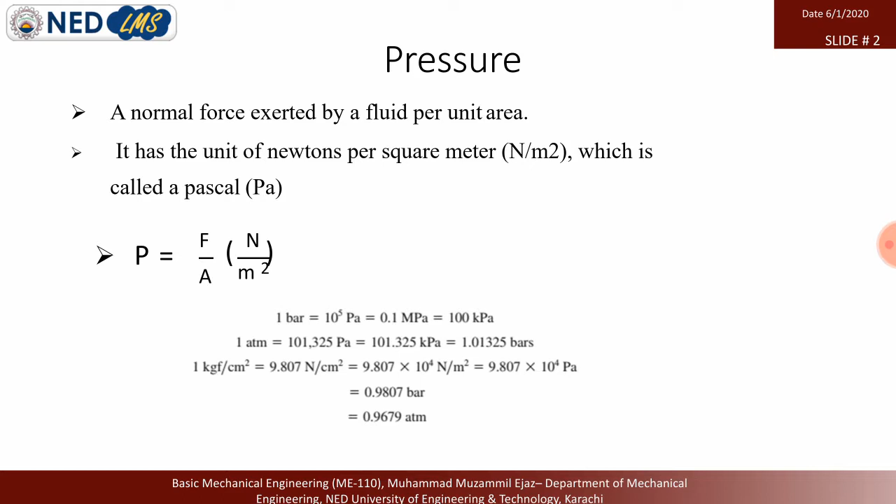Anyway, let's move towards the topic we left in the last lecture. Pressure definition, we already covered its definition and units. In the last lecture, we saw that pressure in liquids increases with depth, because weight due to gravity exerts pressure at different levels. At the top we have low pressure, but at the bottom we have the highest pressure. So this is the experiment.

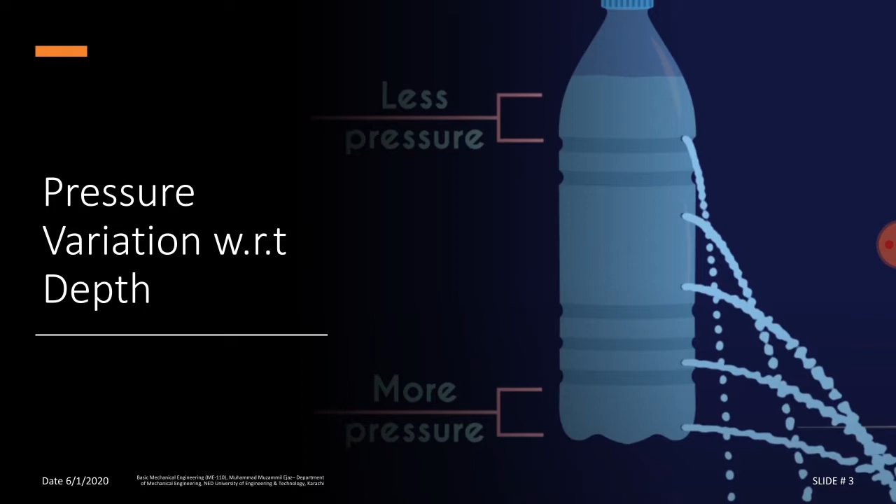In the same way, pressure exerts as atmospheric pressure. When we move above sea level, the pressure decreases. It is well defined in this.

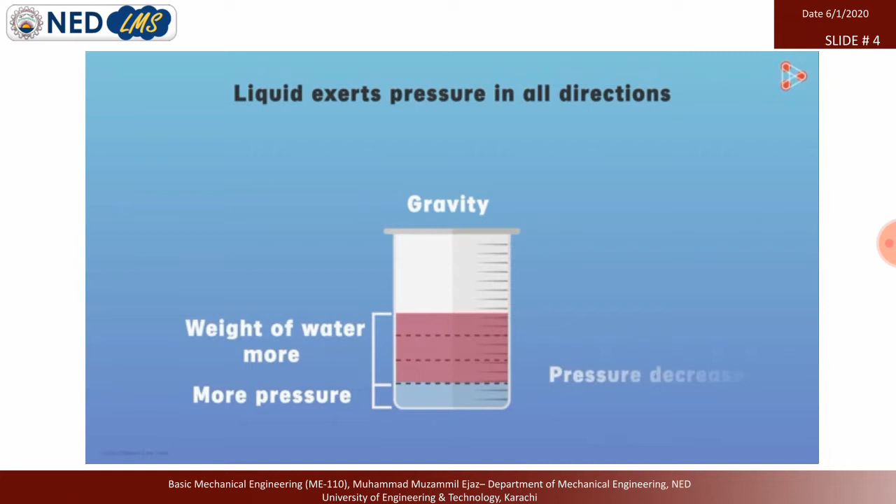Water exerts pressure in all directions. For example, here we have water in a beaker. Due to gravity, this water is pulled down towards the earth. If we divide this water into different layers, each layer is being pulled down by the earth. Due to this pull, water exerts downward pressure, and this pressure is uneven throughout - the bottom layer experiences more pressure than the top layer. This is because the weight of water above the bottom layer is more, and the pressure decreases as we go upwards.

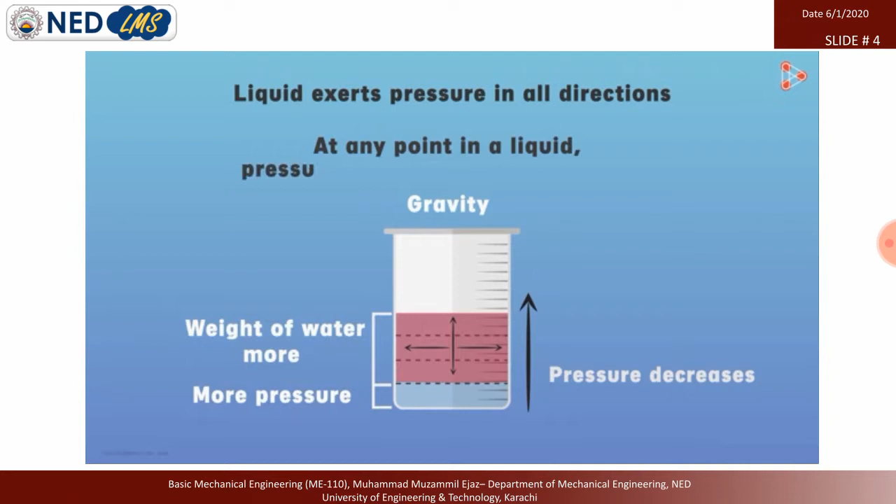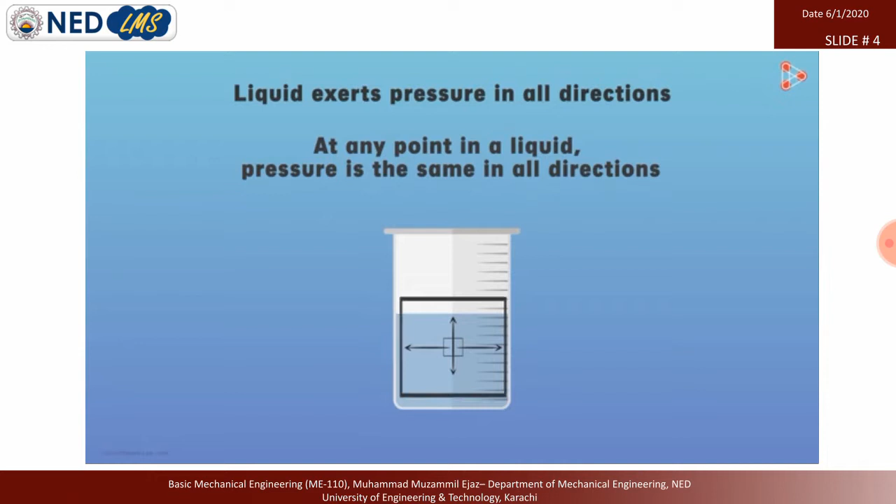In fact, water exerts pressure in all directions, not only downward. One more thing we studied about liquid pressure is that at any point in a liquid, the pressure is the same in all directions. That is, if I take any point here in this water, the pressure exerted by water here is the same in all directions. Air also behaves in the same way.

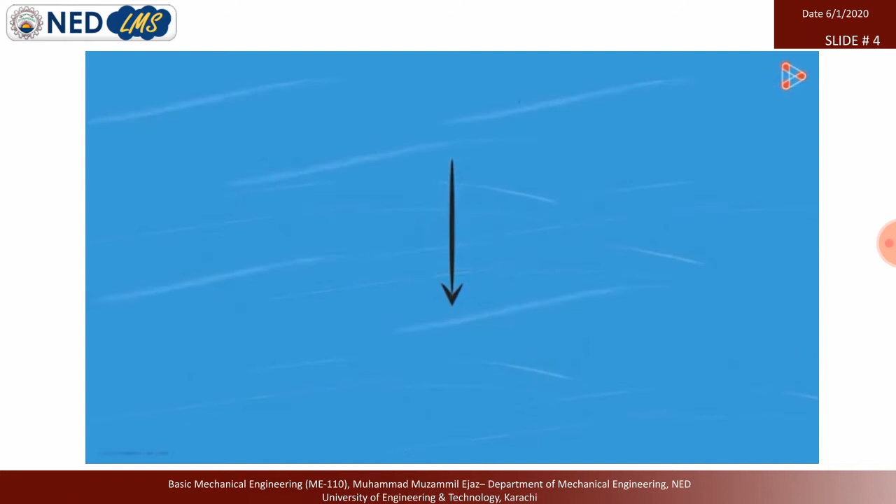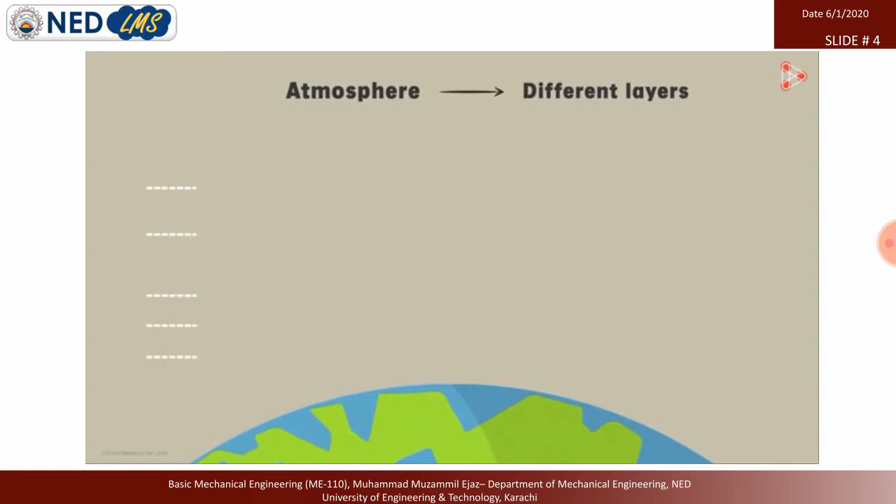Just like water, air is also being pulled down by the Earth's gravitational force. This force applies pressure on the air in the downward direction. The pressure exerted by air is called air pressure or atmospheric pressure. Did you know the atmosphere is divided into different layers? It is divided into 5 layers, namely the troposphere, stratosphere, mesosphere, thermosphere, and exosphere. The pressure in the troposphere, the bottommost layer, is higher than the pressure in the layers above it.

I'm sure you can guess the reason why - this is because the weight of the air above the troposphere is greater than the weight of the air above, say, the stratosphere. The air pressure also acts in every direction, not only downward. Finally, just like the pressure in liquids, the air pressure at a particular height above the Earth's surface is the same in all directions. That is, if I take two points at the same distance above the Earth's surface, the air at this point will exert equal pressure in all directions, just like the air at this point.

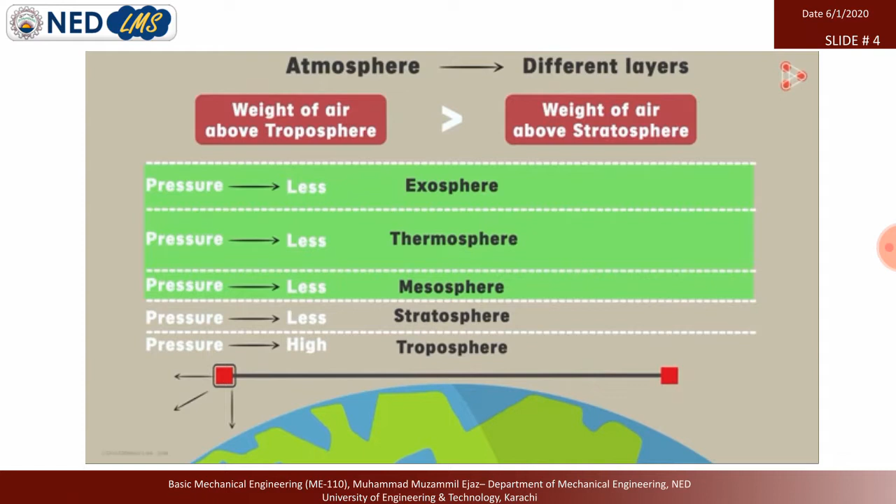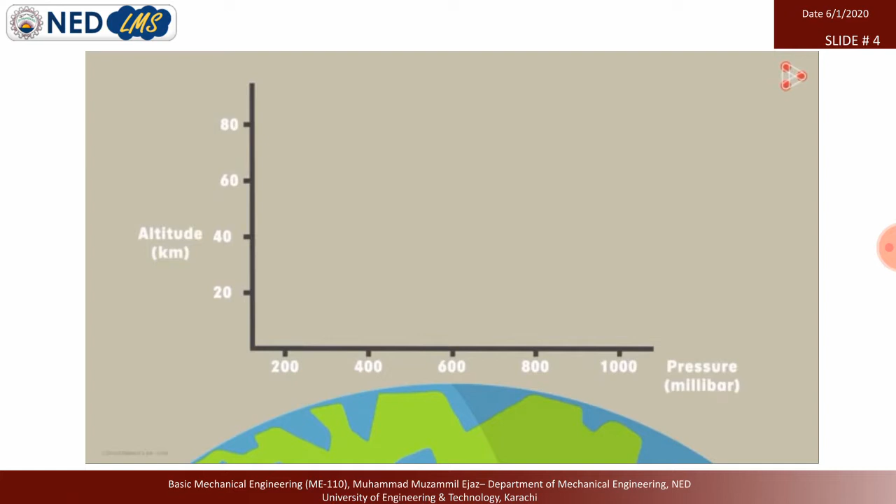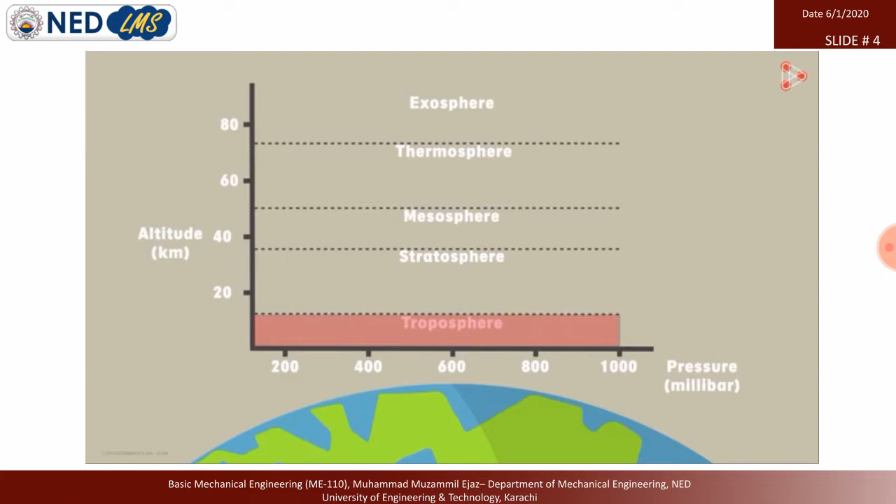Let's look at an interesting graph now, which represents pressure at a particular altitude and how the pressure varies from layer to layer. The troposphere layer is closest to the surface of the Earth, and the pressure in this layer goes up to 100,000 Pascal, where Pascal, represented by Pa, is the SI unit of pressure. This is massive pressure, which pushes and pulls objects on the surface of the Earth.

So I hope you well understand the pressure, atmospheric pressure that exerts in every direction but varies with height. If you fly in a plane above 30,000 feet, the pressure is lower than at sea level. You can see that pressure is like 0.8, 0.7 atmosphere.

Anyway, this is the general definition: the pressure of a local atmosphere is known as atmospheric pressure. At sea level it's 1 atm, and we have different units, like Newton per meter square, Pascal which is 1.01325 times 10 to the power 5, and for psi it is 14.69 pound per inch square.

As you understand atmospheric pressure, the pressure which is above atmospheric pressure and exerts in our daily life is gauge pressure. For example, a tire elevates the whole car because it has higher pressure than air. If we remove the plug of the tire, the pressure inside the tire goes out, because pressure goes from high pressure to low pressure.

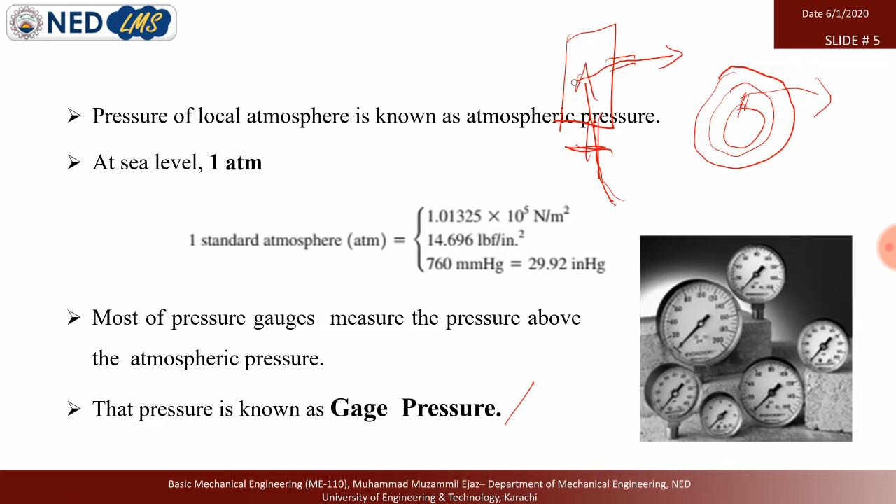So we have another definition called vacuum pressure. The pressure which is greater than atmospheric pressure is called gauge pressure, and the pressure which is less than atmospheric pressure is vacuum pressure.

This is well defined by this equation, and the pressure which accumulates both pressures is called absolute pressure. So absolute pressure is the sum of atmospheric pressure and gauge pressure. But if the external pressure is negative, it's called vacuum, and in this case the absolute pressure equals atmospheric pressure minus vacuum pressure.

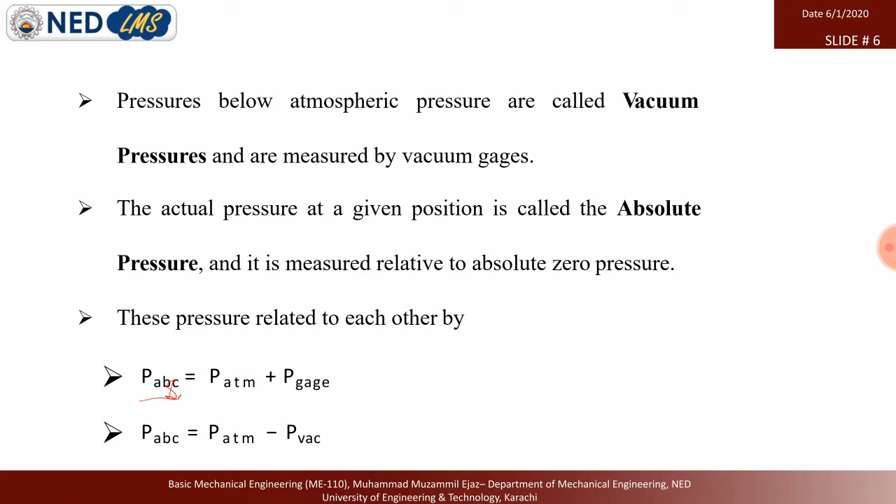By that definition, pressure below atmospheric pressure is called vacuum pressure, measured by vacuum gauges. The actual pressure given at a position is called absolute pressure, and it is measured relative to the absolute zero pressure. These pressures are related to each other by this formulation.

So in positive pressure, it is the sum of gauge pressure and atmospheric pressure, but in the condition of vacuum, it is atmospheric pressure minus vacuum pressure.

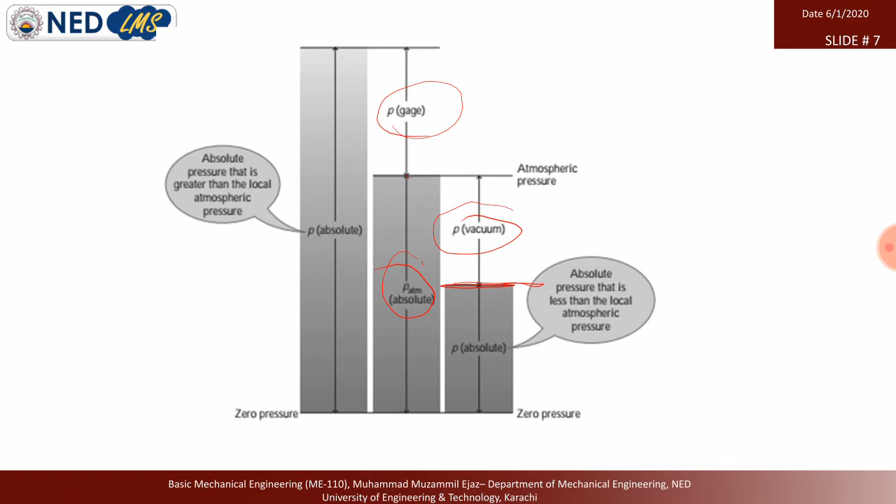Now let's move towards a numerical problem in which we determine the pressure exerted on a diver at 30 meters below the free surface of the sea. Assume atmospheric pressure of 101 kilopascal. The sea level pressure is 101 kilopascal, meaning 101,325 pascal.

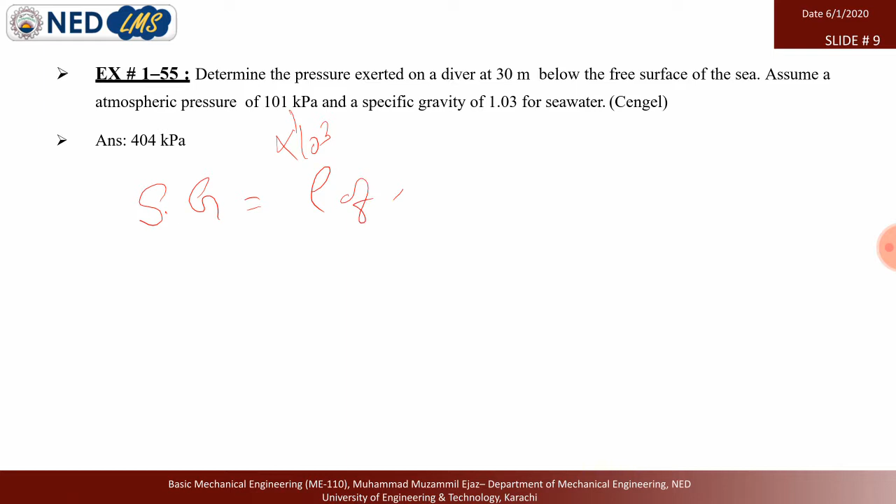First we have to find the density of seawater, because in the formula, if you need to calculate the pressure at 30 meter depth, we know the height, we know the gravitational acceleration, that is 9.8, but we want to calculate the density. So for the density we first apply the formula of specific gravity: Sg equals density of seawater divided by density of standard water.

So Sg is 1.03, and the density we need to calculate of seawater, in short form we write as W, and the density of standard water is simply 1000. So the density of seawater is 1030.

Now in the second stage we apply the formula for absolute pressure. P absolute is equal to P atmospheric plus P gauge, and P gauge is simply rho g h.

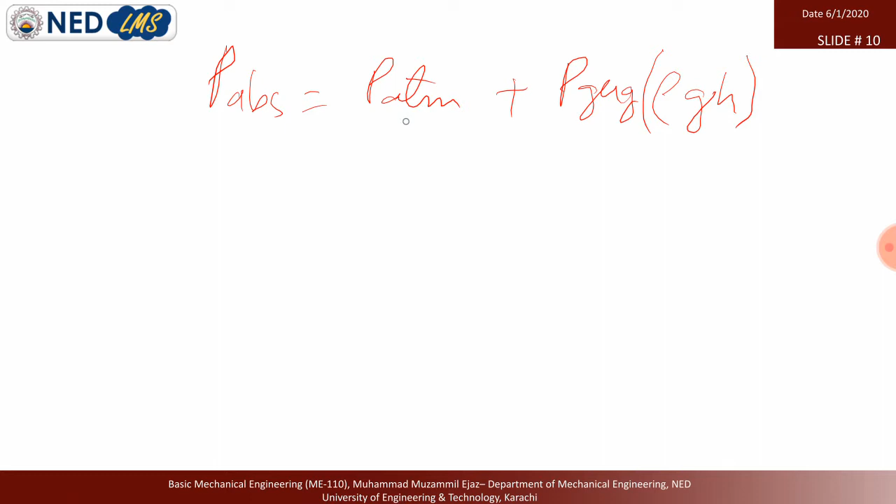In the numerical we are already given the atmospheric pressure, that is 101 kilopascal. So we have to set one unit, whether pascal or kilopascal. If you set atmospheric pressure in kilopascal, you also have to calculate the gauge pressure in kilopascal. This formula in SI units gives the pressure in pascal, so we have to divide the whole rho g h by 1000 to make it kilopascal.

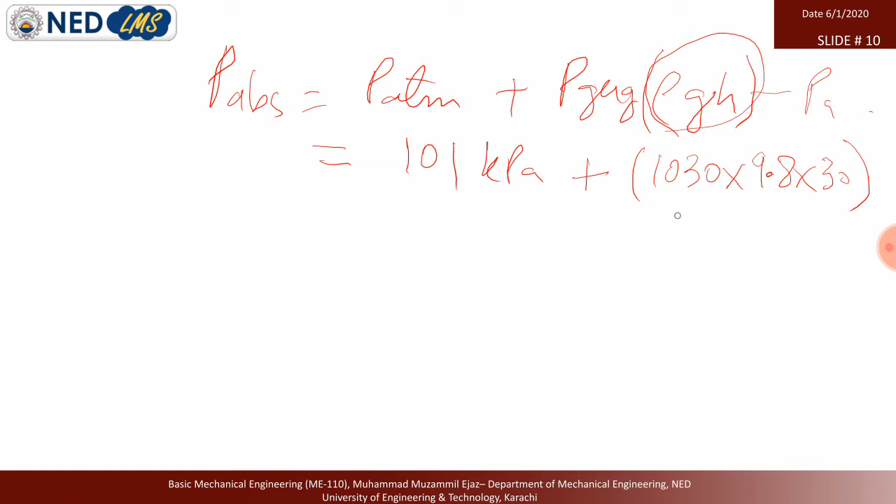So now we have density 1030 multiplied by gravitational acceleration 9.8 multiplied by height 30 meters, and the whole equation divided by 1000 to make it kilopascal. So now 101 kilopascal plus, if you calculate this, it gives the value of 303. So P absolute at point 2 now becomes 404 kilopascal.

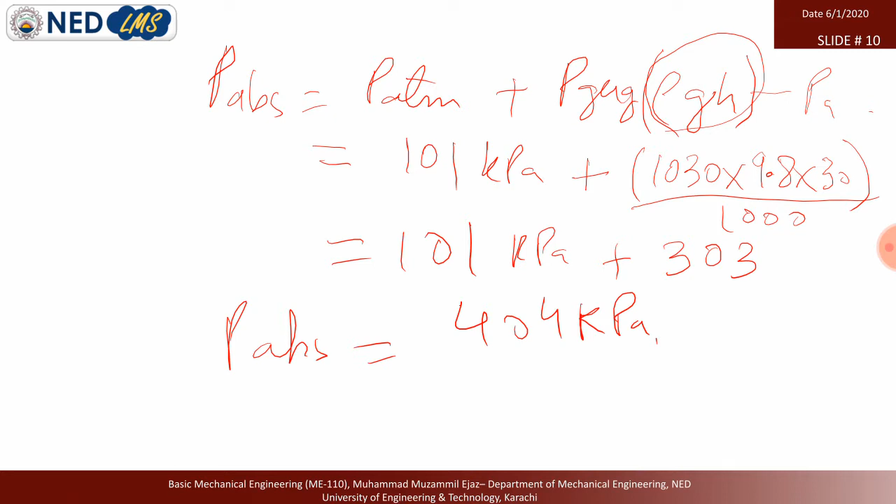In this way we have calculated the total pressure at 30 meter depth below the sea surface. This is the answer.

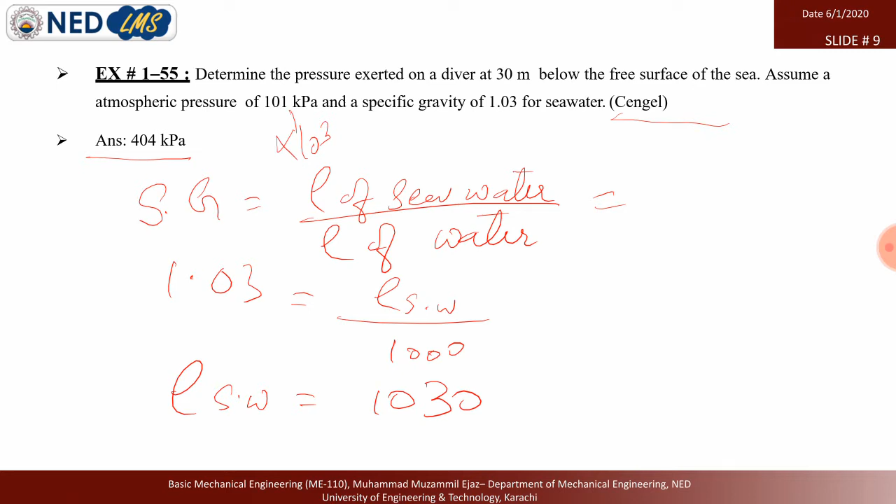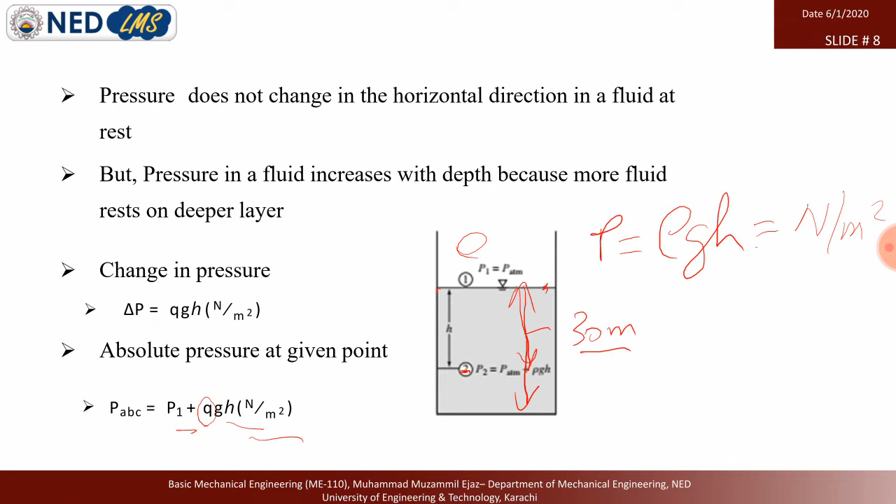This numerical is taken from the book by Cengel, Thermodynamics: An Engineering Approach, example 1.55. I hope you understand the idea; we have done the numerical as well as the definition, which gives the idea behind the variation with depth.

Now let's move to the next slide. We have to study some of the basic tools which calculate pressure. The most basic and significant tool which calculates gauge pressure is the Bourdon gauge.

You see this type of analog parameter in different machines, like if you go to a tire shop, you see the cylinder in which air is compressed shows the pressure by this Bourdon gauge. In many laboratories too, you see parameters showing the pressure of liquids, fluids, or gases.

The main principle of working of this Bourdon gauge is simple: it is a phosphor bronze tube in which air or any fluid enters under pressure, and due to the pressure it takes a spiral shape. When pressure is exerted on this spiral shape, it tends to move and expand, moving upward, and it is hooked by a lever and gear mechanism. As it moves, it turns the gear, and due to the gear the needle moves left to right, showing the variation of pressure.

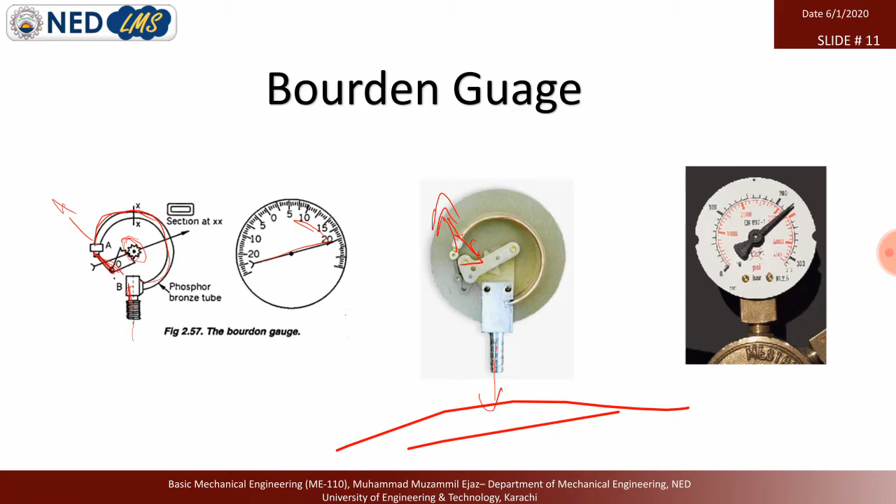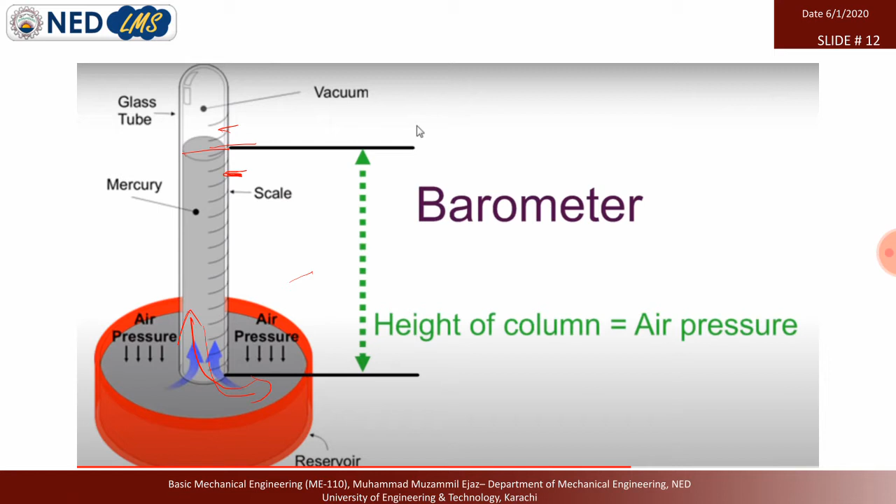So on both levels of the U-shaped tube, the level of the liquid is different - here it is this, and it is this. If we open the vent and remove all the external pressure to the atmospheric pressure, the level becomes the same, like this. So at the same pressure, the level becomes the same. So the variation of this level, or the difference of this liquid level in the tube, shows the external pressure.

We have a very good animation of this.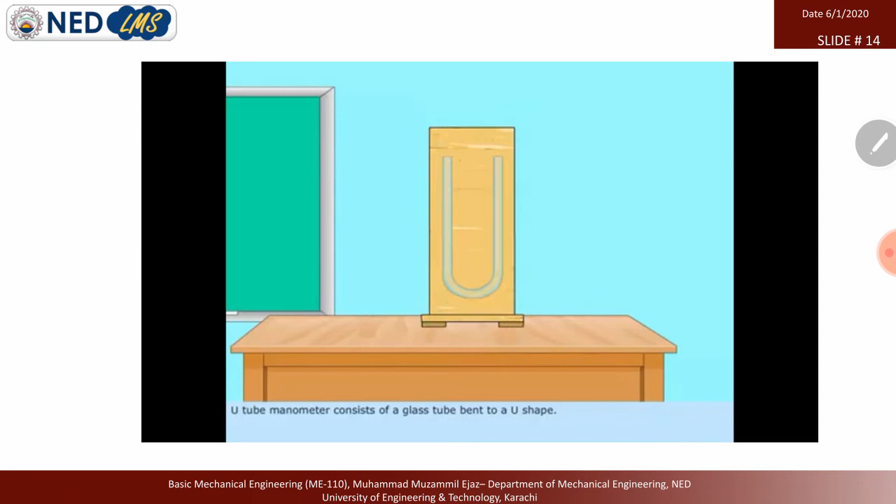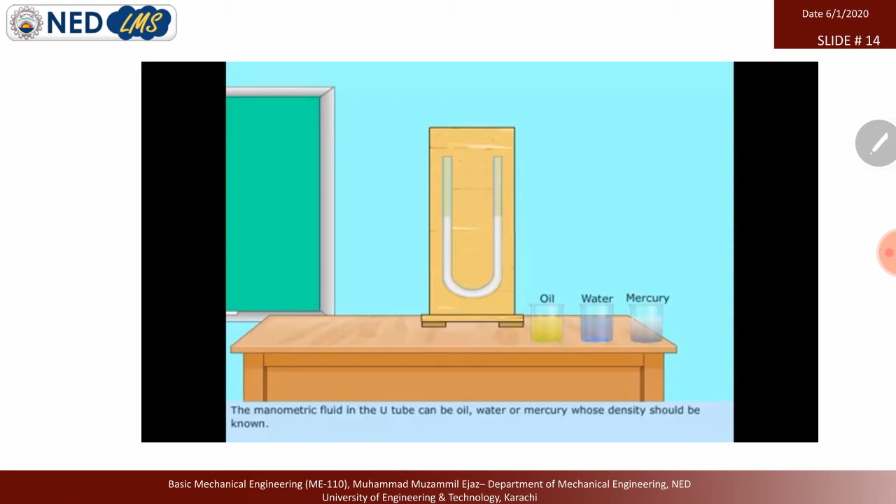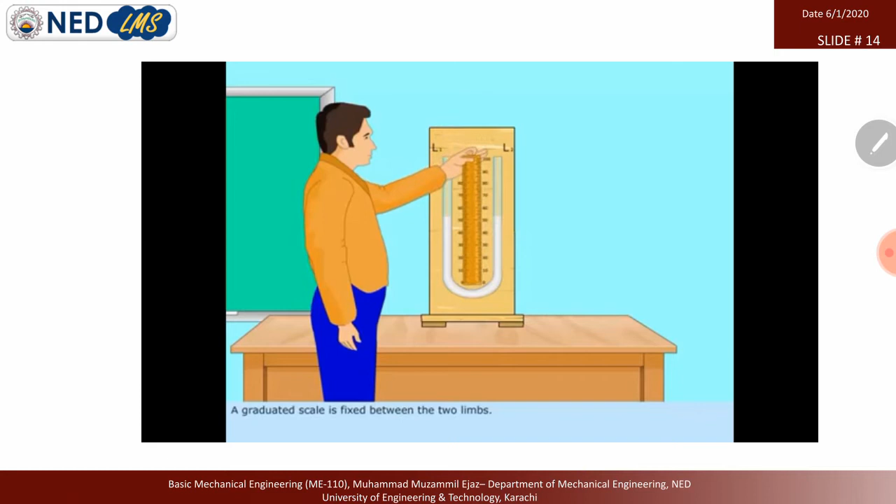Initially, the U-tube is filled with a manometric fluid such that the level of the fluid is the same in both the limbs. The manometric fluid in the U-tube can be oil, water or mercury, whose density should be known. There are two limbs in the manometer, L1 and L2. A graduated scale is fixed between the two limbs. When both limbs are exposed to the same pressure medium, the fluid level in the two limbs will be equal.

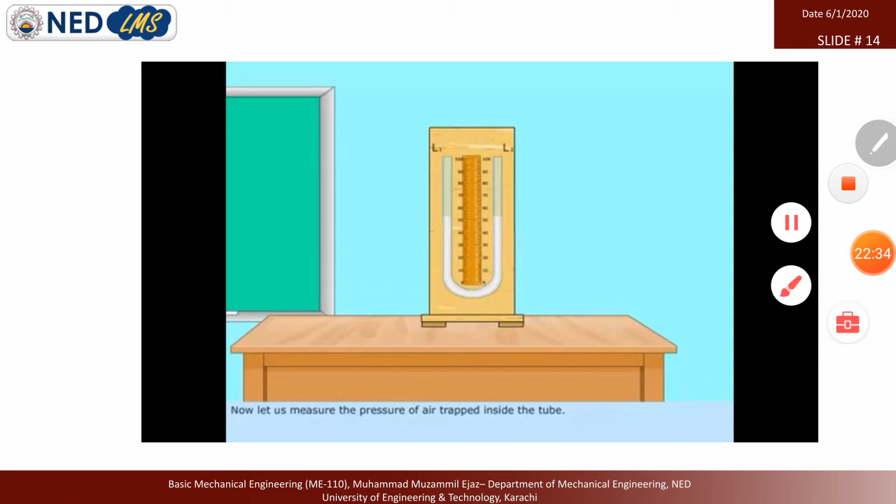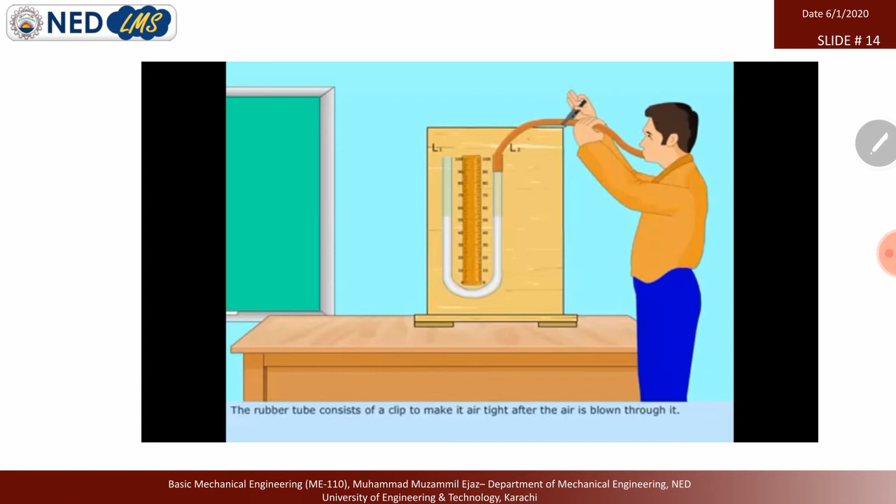Now let us measure the pressure of air trapped inside the tube. The limb L1 is open to atmospheric pressure, and limb L2 is connected with a rubber tube. The rubber tube consists of a clip to make it airtight after air is blown through it. The pressure of the air in L2 is now greater than the pressure in L1. Now the fluid in the U-tube is displaced to a new position. The difference between the two readings will give the height of the fluid level in the tube.

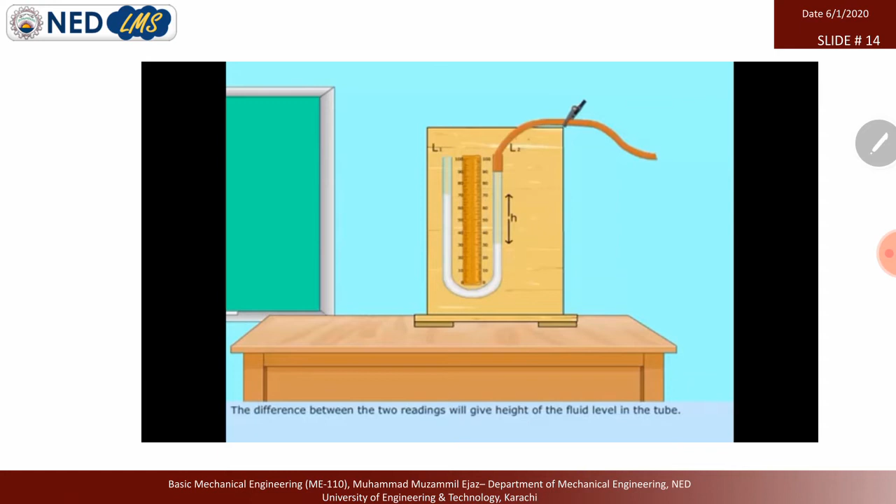The formula for calculating the pressure of air trapped inside the tube is given by P equals rho g H. On substituting the corresponding values in the above formula, we get the pressure value.

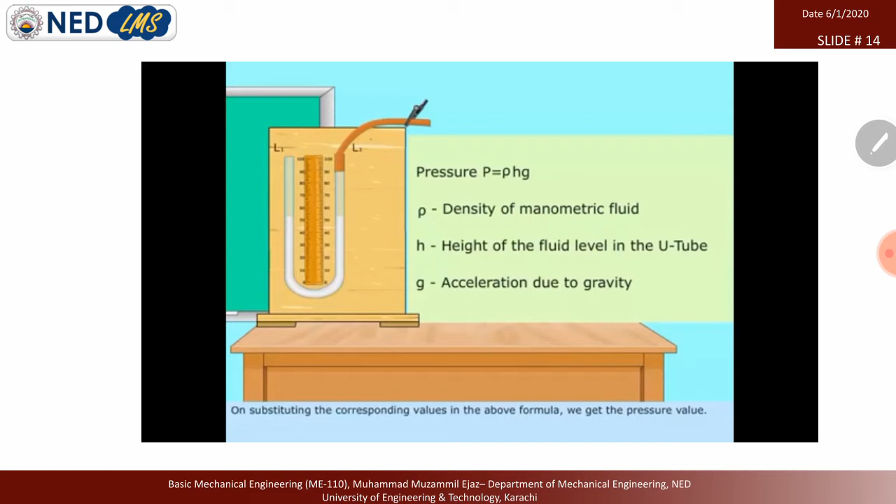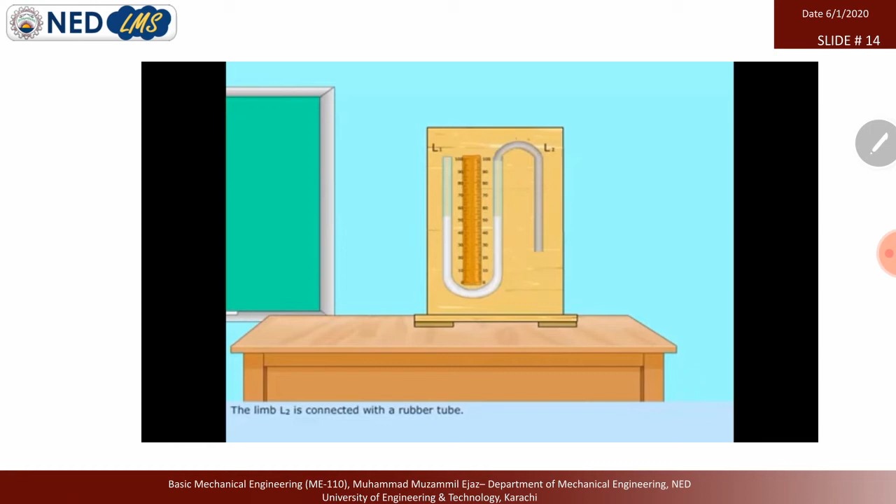Let us now measure the pressure of the water column. The limb L2 is connected with the rubber tube. The end of the tube consists of a funnel closed with a rubber sheet. This tube is then inserted into a beaker of water whose pressure is to be determined. The rubber tube with the funnel is pressed down so that the pressure is induced through the rubber sheet to the tube.

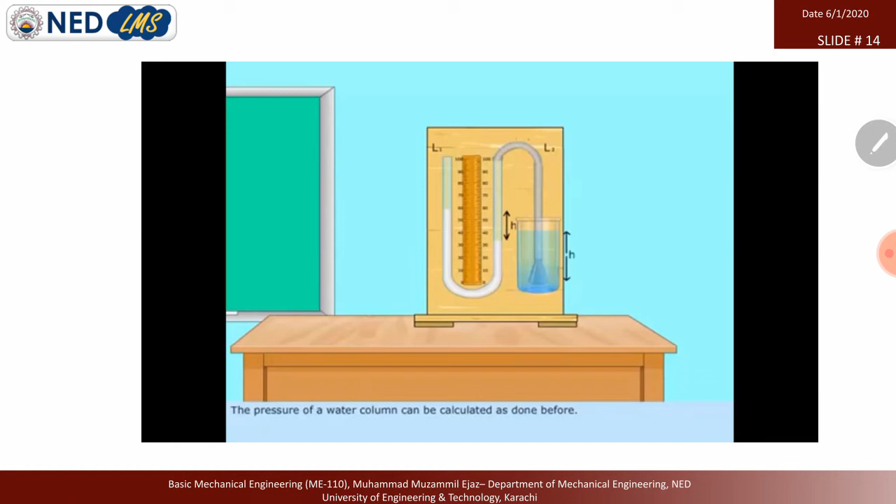Now the manometric level in L1 rises and simultaneously the level in L2 falls down. The difference between the readings on the graduated scale is the height h. The pressure of a water column can be calculated as done before. Thus you have learnt about pressure measurement using a U-tube manometer.

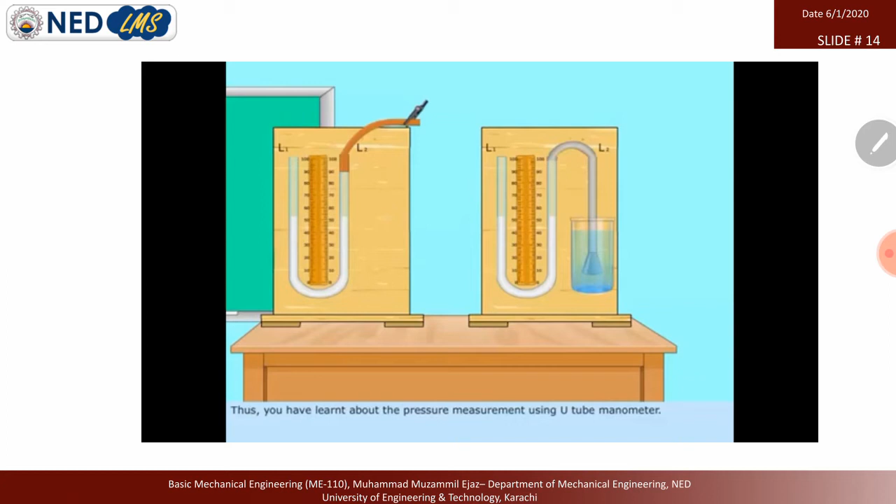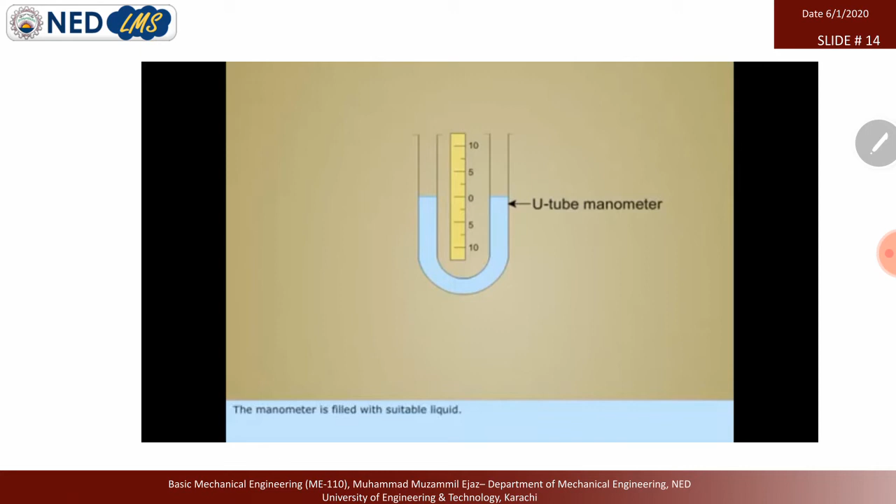In this media, you will learn about the use of the manometer in a turbocharger filter. The U-tube manometer is used mainly to measure differences of pressure. The manometer is filled with a suitable liquid. The two ends can either be connected to two sides of a machinery, or one end connected to a machinery and the other end open to the atmosphere.

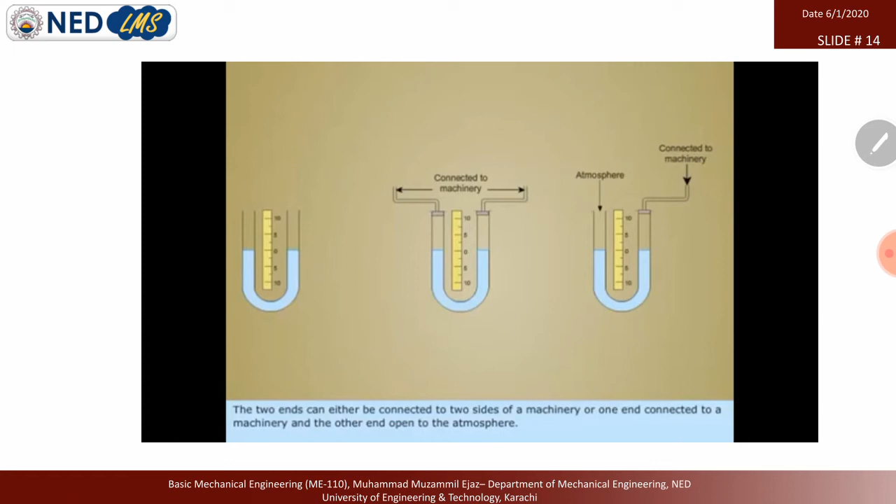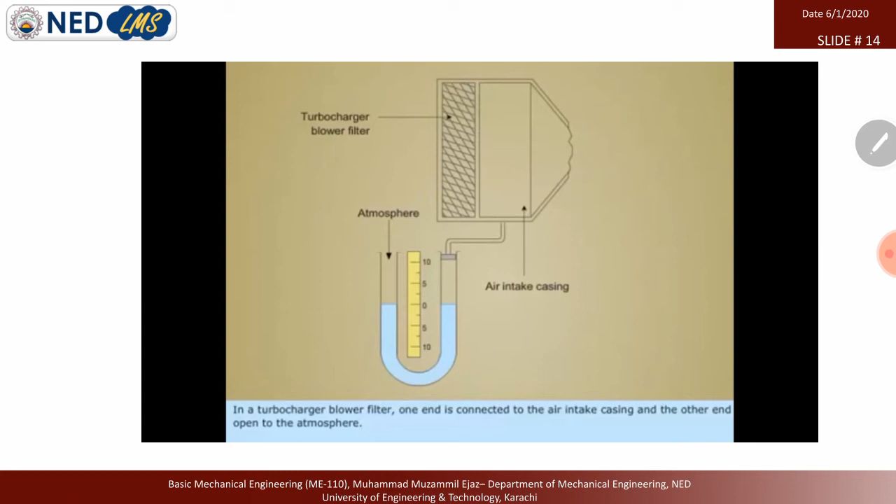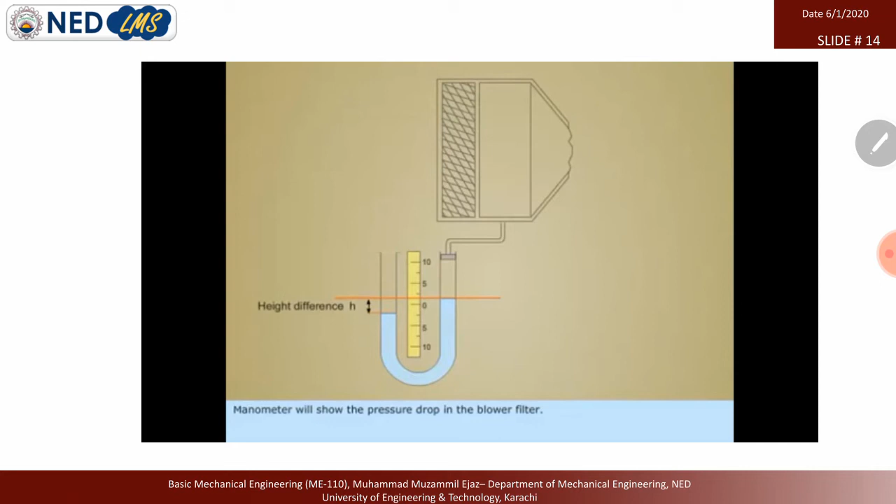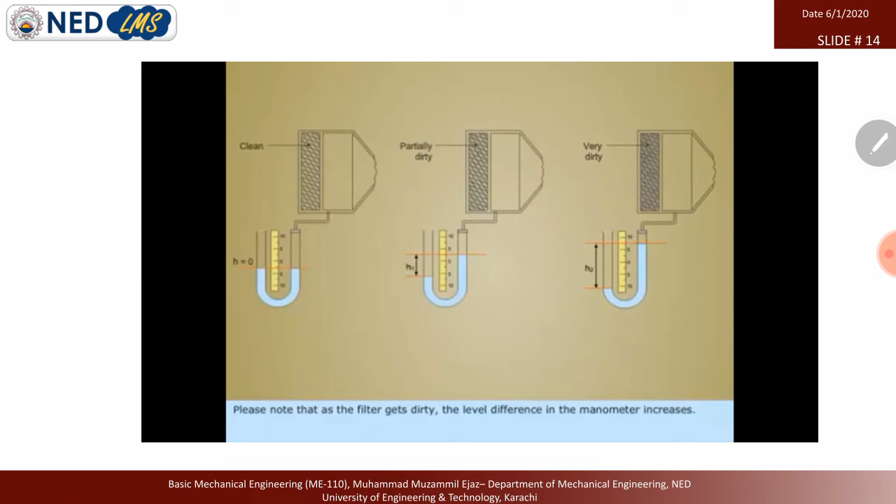Manometer used for turbocharger filter. In a turbocharger blower filter, one end is connected to the air intake casing and the other end open to the atmosphere. When the turbocharger is not running, the liquid level is the same in both limbs. The manometer will show the pressure drop in the blower filter, and it can be used for monitoring the cleanliness of the filter. Please note that as a filter gets dirty, the level difference in the manometer increases. Thus, you have learnt about the use of the U-tube manometer in a turbocharger filter.

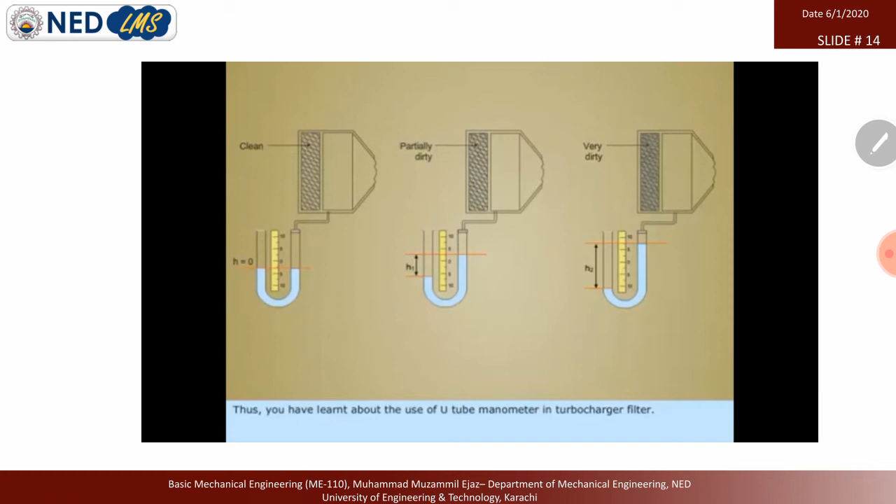So I hope you understand well the idea of manometer and how it calculates the difference of pressure, whether in the machine or the vacuum pressure, like in this turbocharger example. When the filter is choked, air moving out to the machine produces vacuum, and due to the vacuum it shows a difference reading of height, which tells us the cleanliness factor. When the vacuum pressure exceeds that defined point, we need to clean that filter.

So you can also take an example for your civil infrastructure. We have one kind of numerical in this Cengel book, in which we are calculating the height of the building with the help of a barometer.

So if we know the atmospheric pressure at ground level is 1 atm, and let's suppose at the 60 meter height of the building, the atmospheric pressure is 0.8 atm, we know the difference of atmospheric pressure. If we apply the formula P equals rho g h, and we know the density of air and the gravity, we can easily calculate the height.

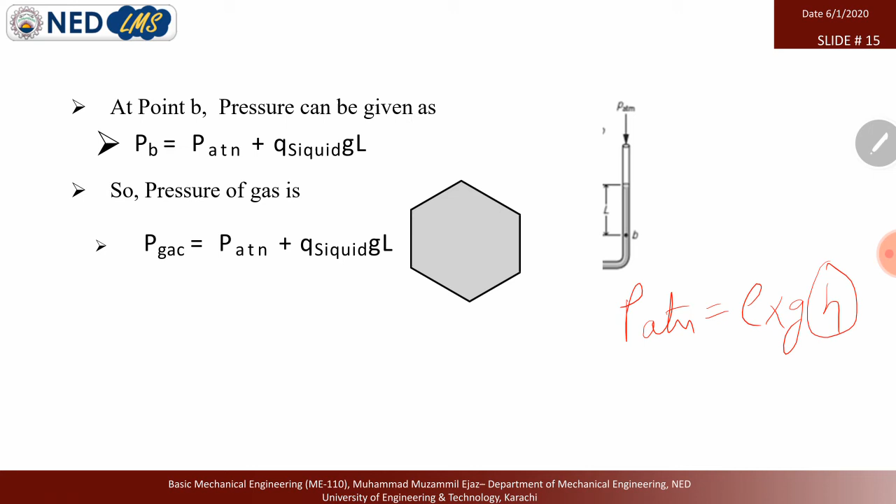From P atm, we know the atmospheric pressure at 60 meters, the density of air we can take from the books, and we know gravity, so we calculate the height of the building. So we have different applications of pressure. You can take it for your civil application. Later we will also do some numericals related to civil engineering.

Now we have numerical example 1.6 from the same book, Cengel. A manometer is used to measure the pressure in the tank. As you see in the video, the fluid used has a specific gravity of 0.85, and the manometer column height is 55 centimeters, shown in the figure. If the local atmospheric pressure is 96 kilopascal, determine the absolute pressure within the tank. So we need to calculate the gauge pressure first, and then we calculate the absolute pressure.

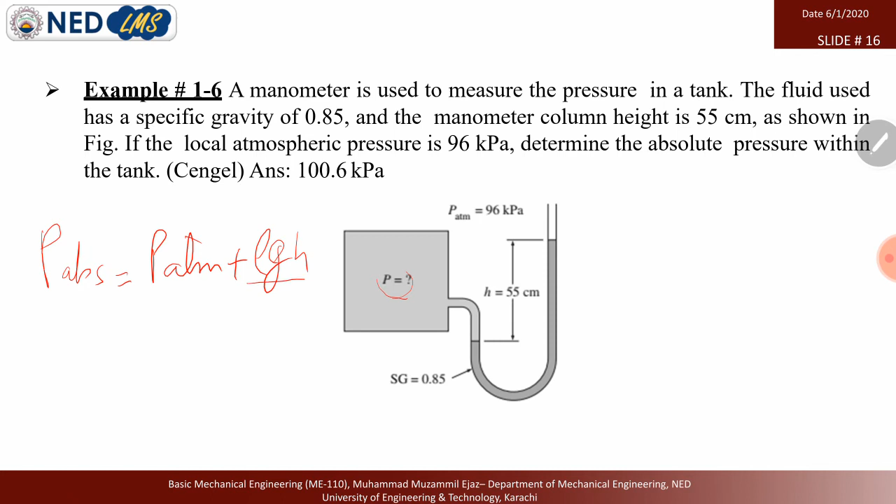So we apply the same formula: P absolute equals P atmospheric plus rho g h, that is gauge pressure. Now P absolute equals atmospheric pressure, which is 96 kilopascal.

We also set this rho g h in the kilopascal factor, so we divide the whole formula by 1000. Density of this fluid has specific gravity 0.85, so we calculate the density using the formula: density of the specific fluid equals specific gravity multiplied by density of water, that is 1000. So 0.85 multiplied by 1000 is 850.

So we directly write 850 multiplied by 9.8, and the height 55 centimeters we have to convert into meters, so 55 divided by 100 is 0.55. Multiplying and dividing by this factor, we calculate 850 multiplied by 9.8 multiplied by 0.55, which is 4581, and when we divide 4581 by 1000, it is 4.58. So 96 kilopascal plus 4.58.

So we have the answer: 100.58. You can convert 100.58 to 100.6 kilopascal. So this is the answer.

Now you have the video of the manometer and the example of the manometer. So in this way we calculate the gauge pressure, the atmospheric pressure, and absolute pressure. If we place this device and read the gauge pressure, it will directly show the vacuum pressure, and when we add the atmospheric pressure we get the absolute pressure.

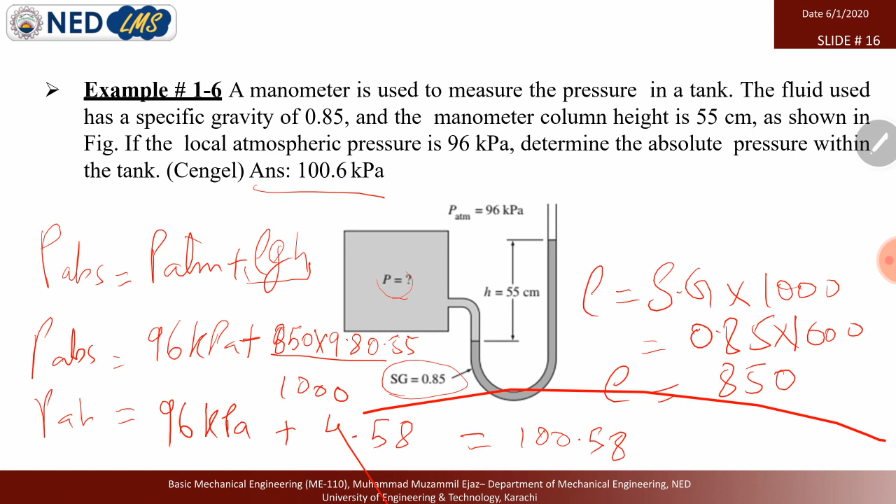Like in the other example, example 1.37, the figure shows a tank. Now we will continue with this numerical in the next lecture, inshallah.